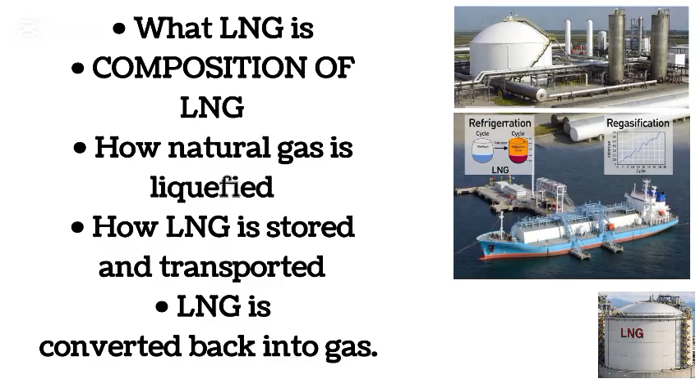Today we are going to talk about LNG, liquefied natural gas. We will cover what LNG is, composition of LNG, how natural gas is liquefied, how LNG is stored and transported, and how LNG is converted back into gas. Let's begin. What is LNG?

Liquefied natural gas or LNG is natural gas that has been cooled to approximately minus 160 degrees Celsius. At this extremely low temperature, natural gas changes from a gas into a liquid. When natural gas is liquefied, its volume is reduced by about 600 times. This means LNG occupies 1/600th of the space compared to natural gas in its gaseous form.

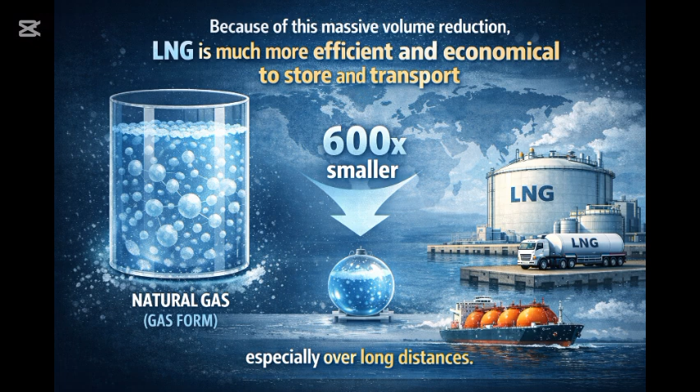Because of this massive volume reduction, LNG becomes much more efficient and economical to store and transport, especially over long distances. To understand this better, imagine 600 water bottles spread across a table. Liquefaction is like compressing all that volume into just one bottle. This is how LNG saves space.

Composition of LNG. LNG is not a single pure substance. It's mainly composed of methane, about 85 to 95%, and small amounts of ethane, propane, butane, and nitrogen making up about 5 to 15%. Methane is the main energy carrying component of LNG.

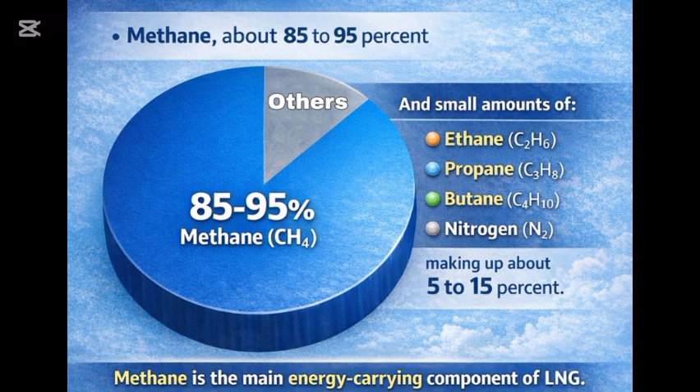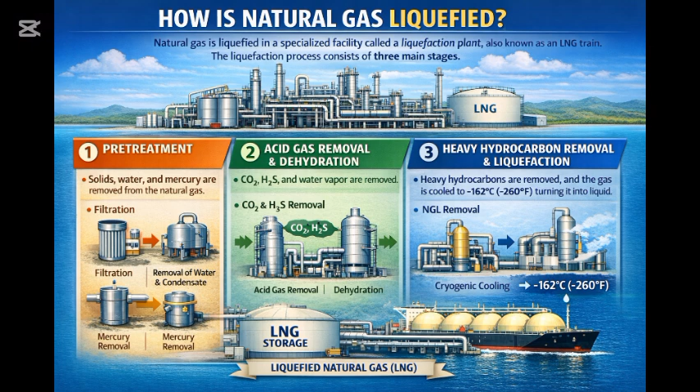How is natural gas liquefied? Natural gas is liquefied in a special facility called a liquefaction plant, also known as an LNG train. The liquefaction process consists of three main stages.

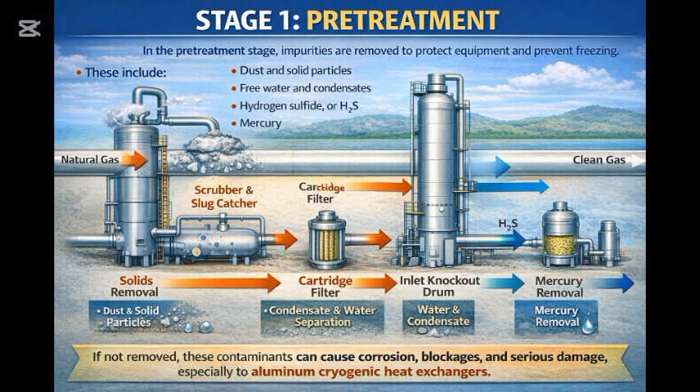Stage 1, pre-treatment. In the pre-treatment stage, impurities are removed to protect equipment and prevent freezing. These include dust and solid particles, free water and condensates, hydrogen sulfide, and mercury. If not removed, these contaminants can cause corrosion, blockages, and serious damage, especially to aluminum cryogenic heat exchangers.

Stage 2, acid gas removal and dehydration. In this stage, carbon dioxide is removed using an amine absorption system called acid gas removal or AGR. Water vapor is removed using adsorbents. Removing CO2 and water is critical to prevent ice formation during liquefaction.

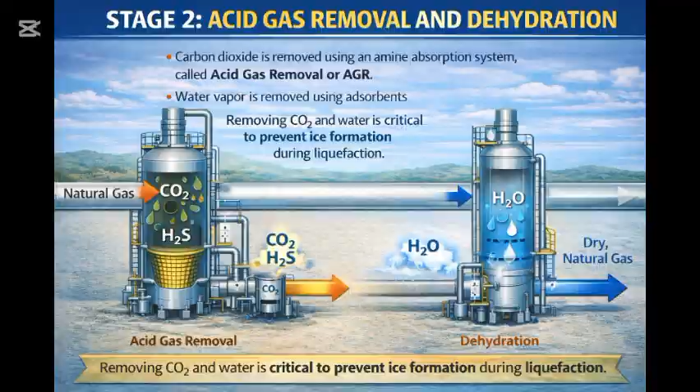Stage 3, heavy hydrocarbon removal and liquefaction. Next, heavy hydrocarbons known as C5+ are removed by fractionation. The gas is pre-cooled to about minus 35 degrees Celsius using propane refrigeration. The gas then enters the main cryogenic heat exchanger or MCHE.

Inside the MCHE, natural gas is cooled, liquefied and subcooled to temperatures as low as minus 160 degrees Celsius. A mixed refrigerant system provides the cooling. Small amounts of flash gas and boil-off gas are produced and reused as fuel for compressors and turbines. This is how LNG is produced.

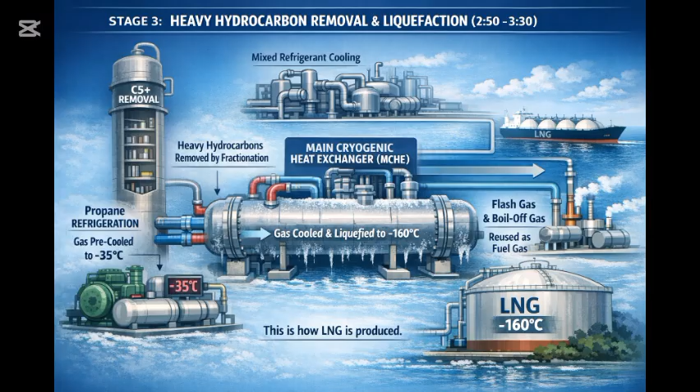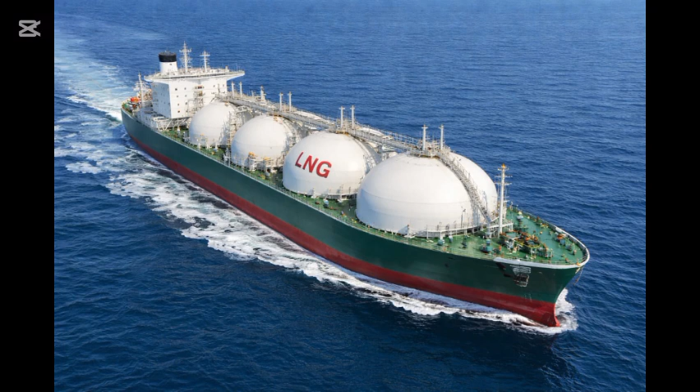How is LNG stored? LNG is stored in full containment storage tanks, typically with a capacity of around 160,000 cubic meters. How is LNG transported? LNG is transported using specialized double hull LNG carriers. The double hull design provides additional safety and protection against leaks or damage during transportation.

How is LNG converted back into gas? At the receiving terminal, LNG is converted back into a gas in a process called regasification. This is done using heat exchangers, commonly by two methods. Number 1, submerged combustion vaporizer or SCV. A small portion of LNG is burned. The heat produced is used to vaporize the remaining LNG.

Number 2, open rack vaporizer or ORV. Ambient water such as seawater or river water is used as the heat source. LNG enters from the bottom and exits as a gas from the top. The water is then returned to its source.

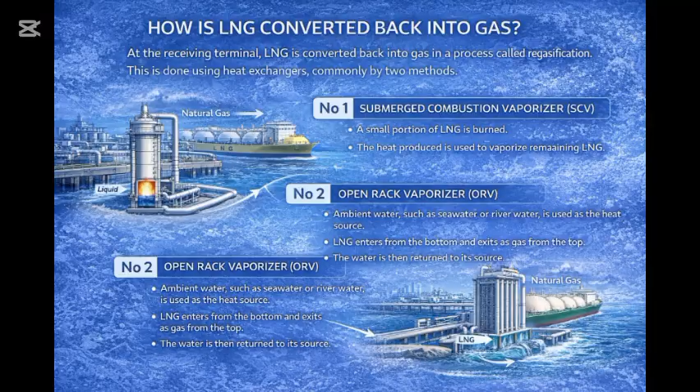To summarize, LNG is natural gas cooled to minus 160 degrees Celsius. Its volume is reduced 600 times. LNG is mainly methane. Liquefaction involves pre-treatment, impurity removal, and cryogenic cooling. LNG is stored in full containment tanks, transported by double hull ships and regasified before being supplied to users.